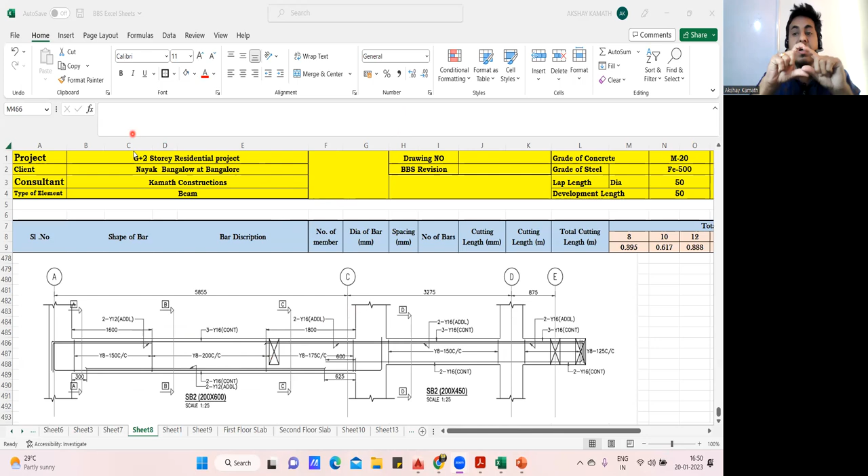Just look at this drawing, you can do the BBS of this. What is the difference in the BBS of this is, see, previously whatever beam we used to take, all were having the same depth, right?

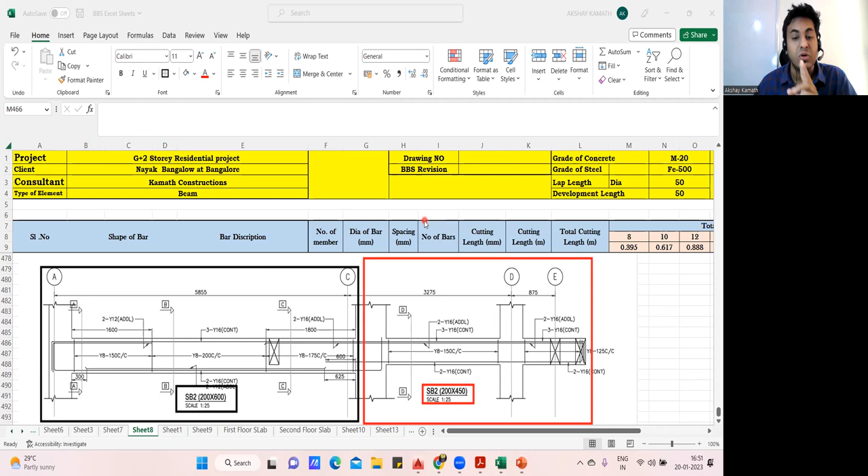But here if you observe, we have two different depths. You can see this beam depth is 200 by 600, that is this particular beam up to here. After that, the next beam is 200 by 450 depth. So now, since the beam depth is different, your BBS remains the same, but one small change will happen. We'll try to understand that.

In case of top reinforcement, nothing will happen. This is your top reinforcement. Your bar will start from here, go all through, and stop here.

Can you read the number of bars required? It requires a 16 diameter 3 bar. Here also it is 16 diameter 3 bar. That means from A, B, C, A, okay there is no B, A, C, D, and E - throughout you are going to provide a 16 diameter 3 bar at the top.

You can do the BBS of this because you know the length, this clear span, you know all the offsets to be deducted. You can do that, that is not a problem. And also the top left extra, right extra can be done.

Again, you can see you have to provide a 12 diameter 2 bar, that is a top left extra up to 1600. This also you can do. Similarly, if you come at the center span, you have to provide a top extra here of 1800 length, and it will be a 16 diameter 2 bar.

Similarly, if you come on this side, again you are supposed to provide a 16 diameter 2 bar additional, you will provide it up to here, and then from here again 16 diameter 2 bar additional you are supposed to give. Those things you can do, but the main question is about the bottom bar.

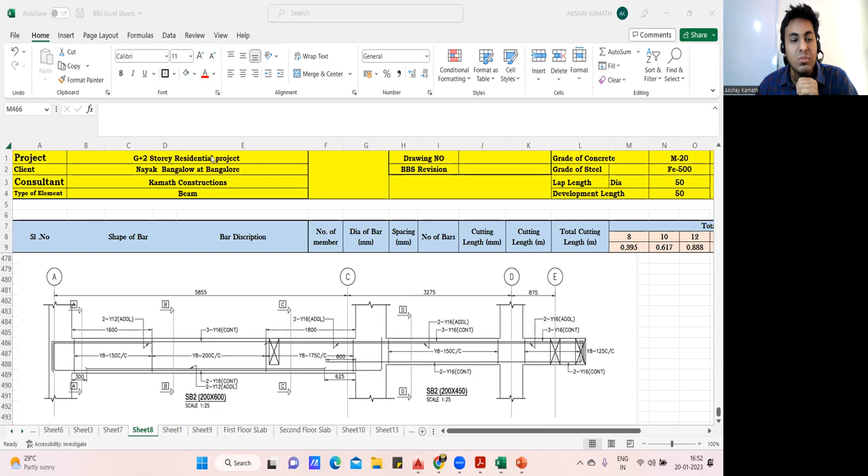Now in the bottom, you see the bottom bar will start from here. It won't go completely. It has come here, and from here you see it has gone like this. Did you see this? Why is it like this? Why is it that we are not taking the bar completely?

The reason is about the depth. You see, this is 600 depth, that means your bottom will be here. This is my 600 bottom, and this bottom is 450. My 450 will be here.

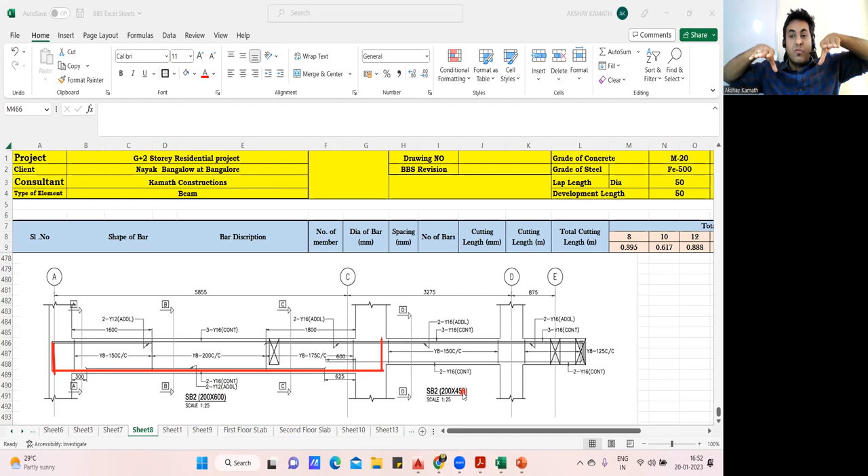The top level will remain the same in the beam. If I'm seeing from the top, my 450 and 600 beam, from the top it will look at the same level. That is why the top bar I took completely. Whereas in the bottom, 600 will be here, 450 will be here. So you cannot take your 600 bar completely because your 450 is starting from here.

That is why what we do, you see this bar has come here, gone straight, then it has given the development length here. And the next bar, what we do, we start from here, we brought it, and like this we are going to bring it. We have to overlap it. Only that is the catch, what you need to do.

How much is the overlap length, that is given - this is 600 additional length you have to consider. This much BBS you can do. I'll explain you once again what you're supposed to do - how you'll find the development, how you'll find the bottom bar for this.

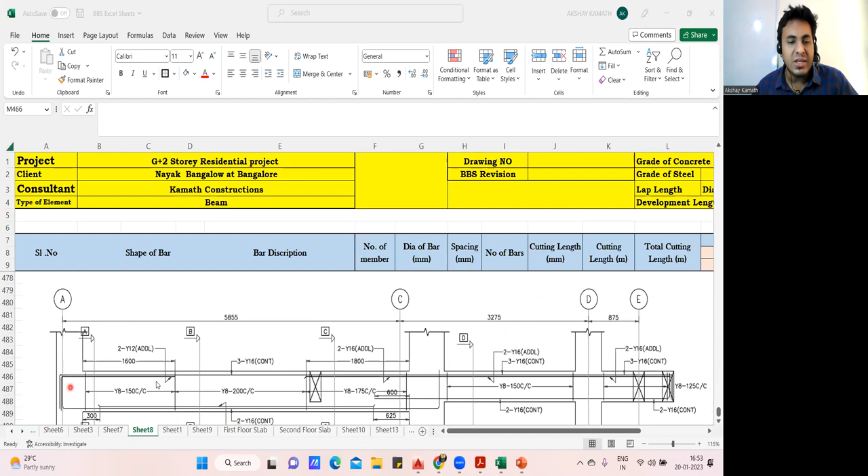It is very simple. This clear span you can find from where, from here to here you can easily find it. This is clear span. Then this width, next you have to find this one.

How will you find this? Whatever is the width of your column, from there you deduct one cover of the column, that is 40, so you'll get this length. Similarly here also, whatever is the width of this column, from there you deduct one column cover, you'll get this one.

Regarding this portion, you know how it has to be done. They will give you the development length. So whatever the development length is given, in that the red color portion is already taken care of.

Whatever is left out, you have to do this. If that is not given, then whatever is your depth of the beam, from there you deduct the top cover and the bottom cover, and then you multiply, you take 2/3 of that. Then also you'll get this. Otherwise, usually they give development length, which we used to do. This is 57 times the diameter of the bar. So 57 times the diameter of the bar minus, if I do this one, I'll get this.

So this you can find. Similarly, whatever you get here, the same thing will be here. So this BBS can be done easily. Now, when you start the BBS for this on the other side, it will start in this way. This also remains the same. So this bar has to be taken up to here.

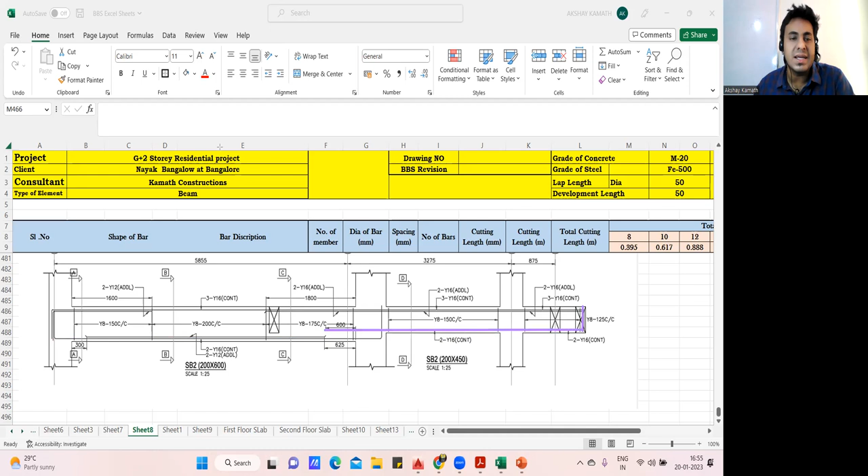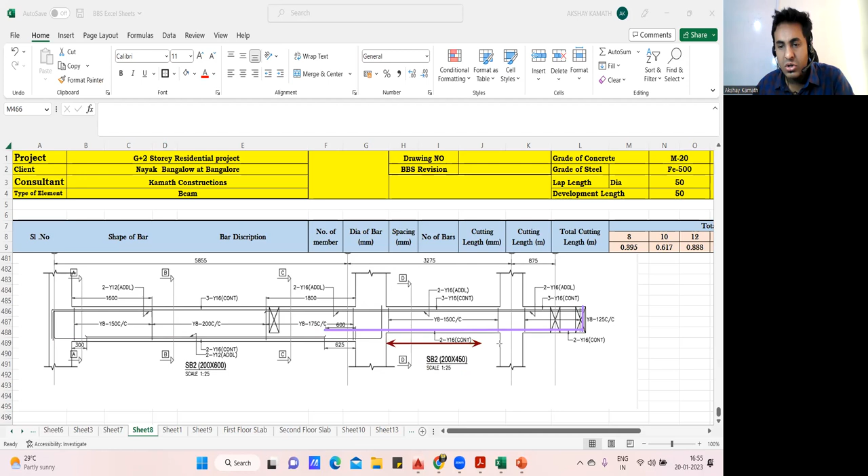So how you will find the cutting length of this? Cutting length will be very simple. What you do, you take the length from here. You know this length, isn't it? This length can be found easily from the face of this column to this outside. You can get the length. How? It is already there in the drawing, or you can do that calculation from the AutoCAD. This length you will be knowing.

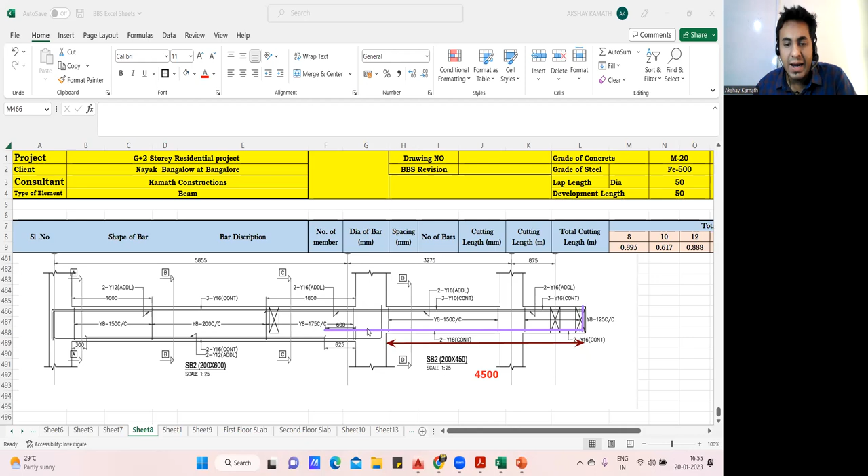Let us consider this length. I'm taking some random value, which is 4.5 meter, or let us say 4500 mm. Now, for that, I'll add the width of the column. And again, this 600 mm extension they have given, that means from the face of your column how much extension it has to happen. It is mentioned 600 mm. So 4500 plus the width of the column plus 600, I'll get the total cutting length of this bar. Very simple.

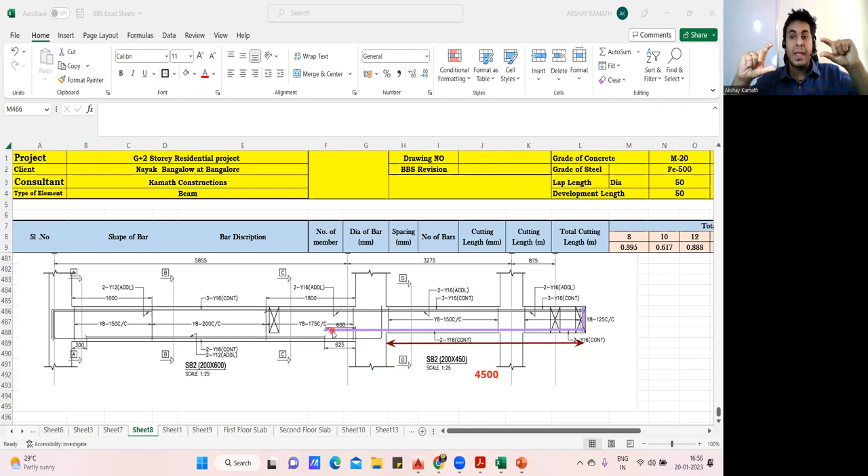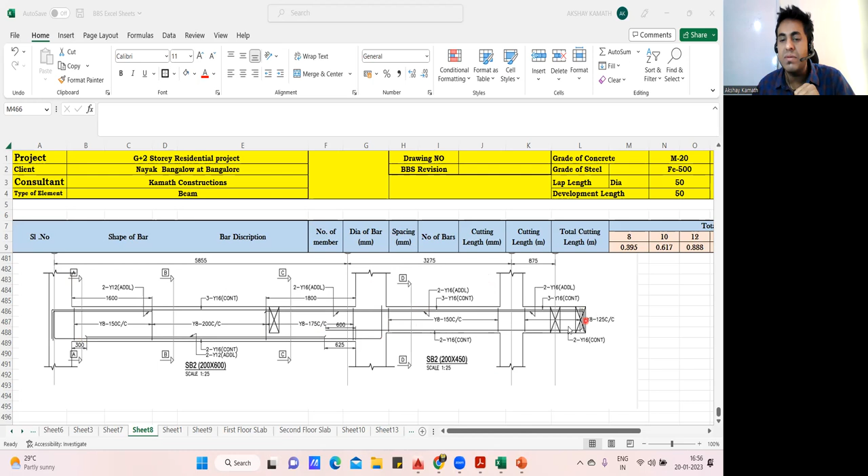This you can do. So this usually comes when you have two beams having a different depth. That is why I wanted to explain this part, why I took this as a kind of complicated beam. Otherwise, the rest remains the same. Finding the cutting length, everything remains the same. Only thing is you cannot take the bottom bar completely. Your bottom bar will stop here, and this bar will come from here. This is one change which you need to understand. Similarly, you'll get different bars like that. So based on that, you're supposed to do it.

Let me check if I have any other beam similar to that. Other than that, rest all beam sizes are same. Whenever there is a varying depth, this is how we are supposed to do that.

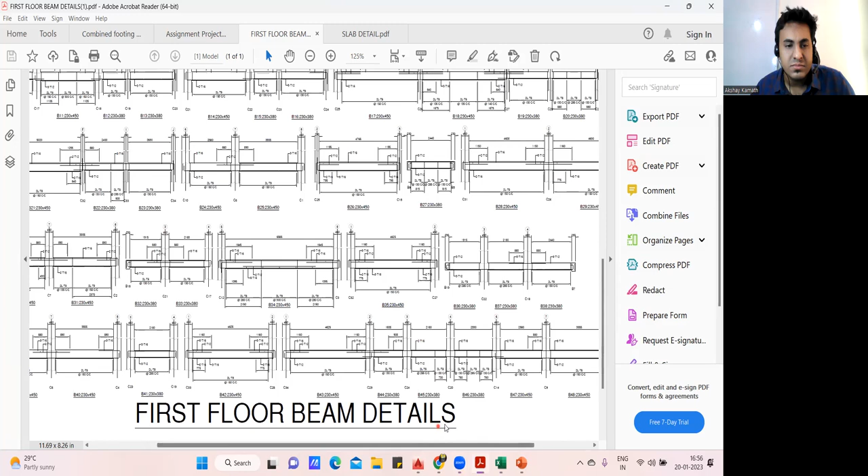This is one more drawing where the same thing has happened. This beam depth is 230 by 450, whereas this beam is 230 by 380, 380, 380. So there is a variation in the depth. That is the reason you see the bottom bar has come like this, and then it has come like this, and it has gone like this.

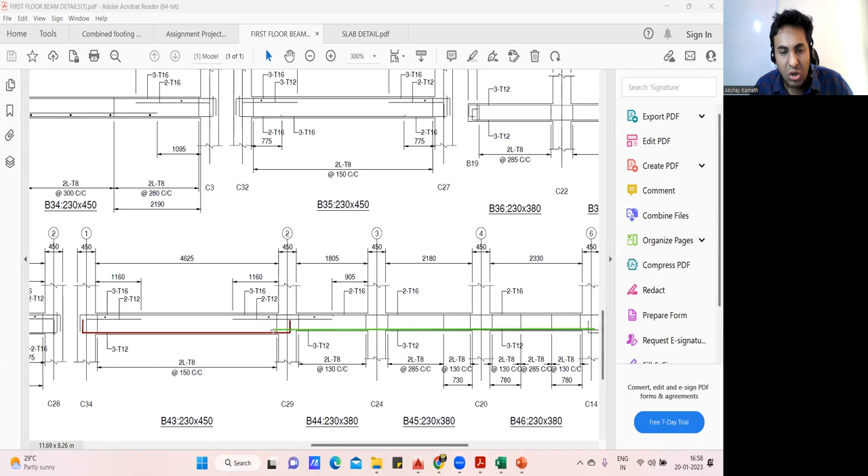And the other bar, how they have done it exactly: it has all started from here and gone like this. So how much is this extension, the green color which has extended from here to here, that will be mentioned. Here it's not mentioned, but usually in the drawing they will mention it. Based on that, you have to prepare the BBS. Rest all things remain the same.

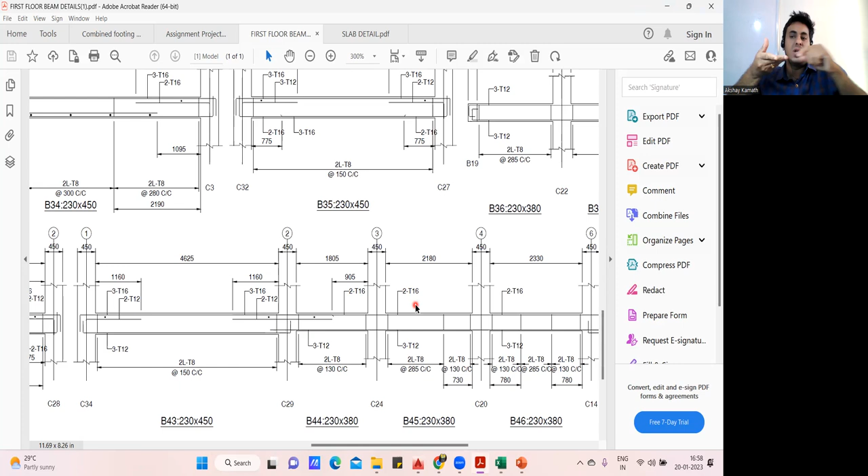So whenever you have a beam of different depth, this is a kind of drawing they give. And you know the reason: 450 level will be here and 380 level will be here. So when you pass your bottom bar, it cannot be bent and taken to the top. So what we do, we stop our bottom bar here only, that is 450, and the 380 bar will be taken like this, it will overcross. That is why you can see the same thing happening here.

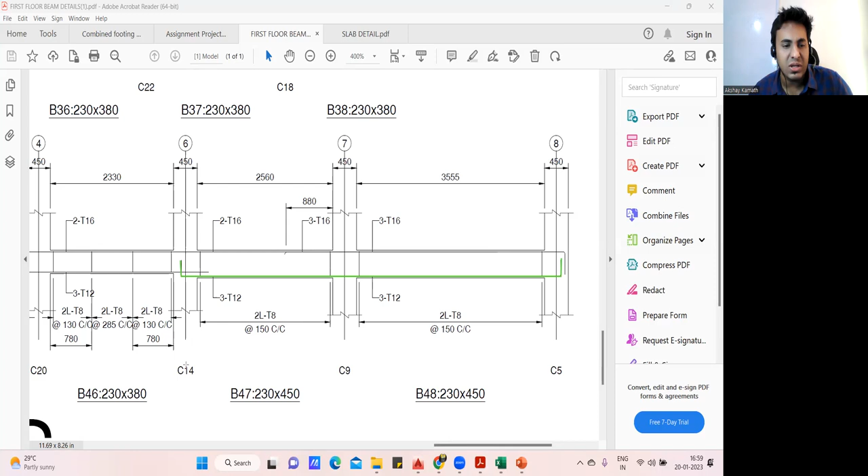Rest all things you can do. There is the same thing here also. This is 380, this is 450. So you see how the bar has come, this bar has come here, and since it's 450, they have taken it like this. Then the 380 depth bar will start like this, it will go like this.

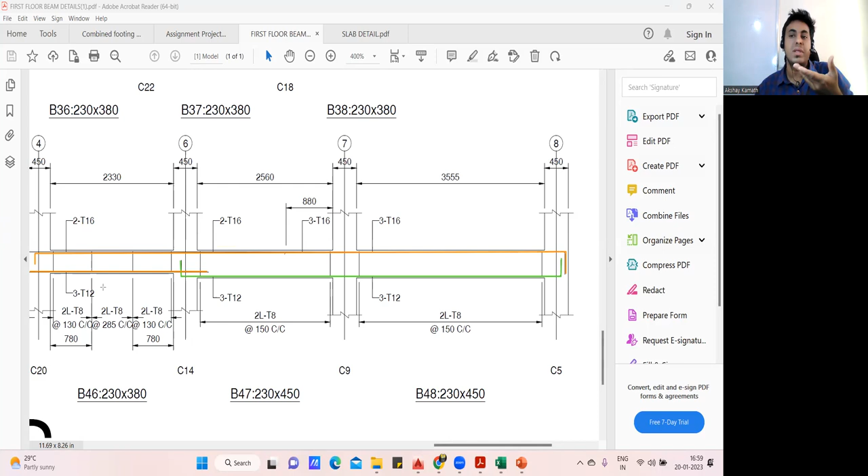Whereas top bar will be continuous only, because the level will be same, no? So at the top there won't be any difference. Top will be same like this, it will come. Only at the bottom there will be a difference. Got it? So this is one thing which I wanted to tell. Other than that, rest all BBS you can do on your own.

Now another question. Sometime what happens? If I go to the general drawing, I already explained you this.

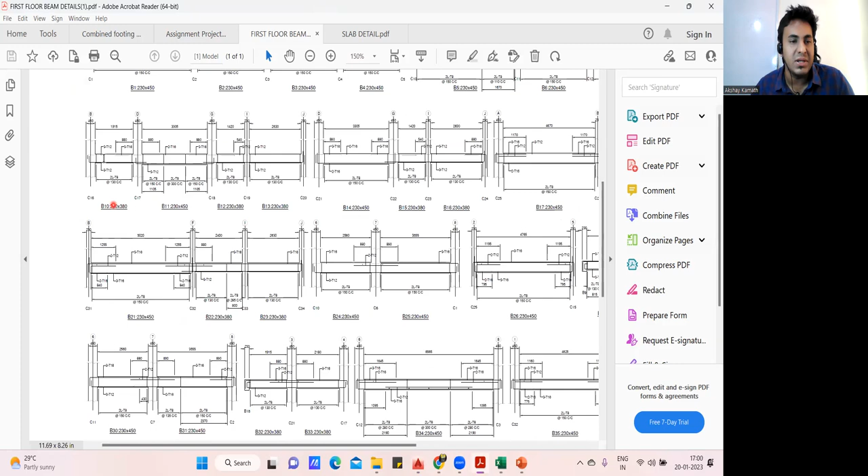So this is a typical layout that you get. Suppose, see now what has happened here. Sometimes the structural consultant will not give you how much is this top extra bar and all. Like here they are mentioned, isn't it? Here these people are mentioned.

From here it is 800 mm, from here it is 880 mm, and then here you can see top left extra is 1255 and all. But few of the consultants don't give that.

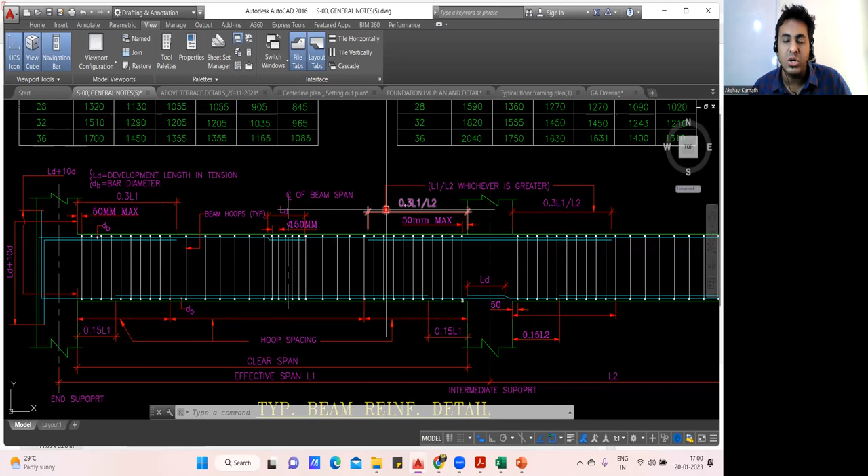So in that case, what you're supposed to do is get something called a general drawing. In the general drawing, remember your top right extra and top left extra should be 0.3 into L1. This is 0.3 into L1, or some people take this as L by 4, some take L by 3. L by 3 is 0.33, which comes out to be 0.3 into L1. Some people take this as 0.25 also. That is also correct — it totally depends on the consultant giving you the drawing.

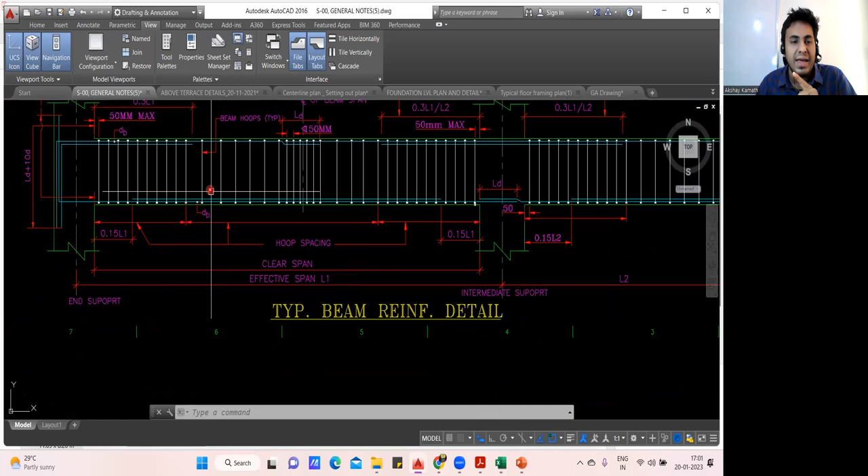If it doesn't mention, you can refer to a general drawing. You ask for a general drawing, and based on that you can do the calculations. That is how you're supposed to do it. Here L1 is the effective span, from the center of this column to the center of this column. So if you want, I can take one example.

Let us consider my effective span is 5500. Then what will be my top left extra? You just tell me — what will be the length of this top left extra?

You just take the formula 0.3 into 5000 — it should be from effective span, center of the column to center of the column. So 0.3 into 5000, it will be 1500. Finish — you got the answer. If somebody asks you what should be the green color length, it is 1500. Same here also it will be 1500. That is how you are supposed to do it, and based on these calculations only, all these things are given in your drawing.

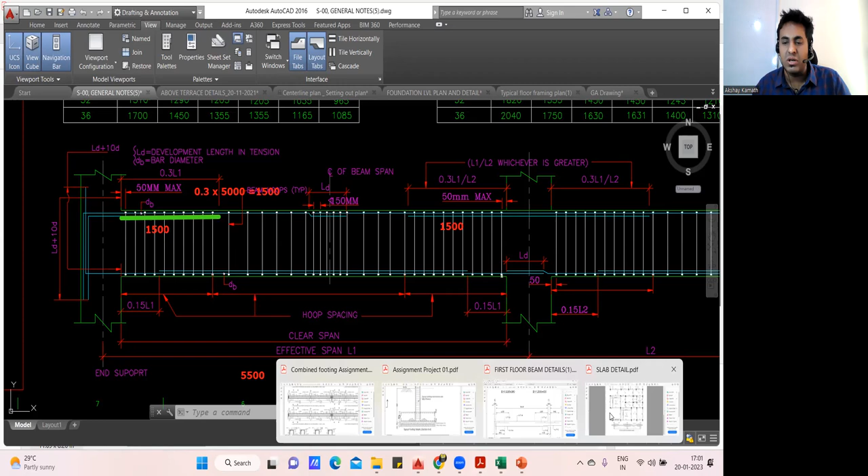How did the person get 1255? He took 0.3 into this value, so he got 1255. Now again, 0.3 is not constant — some people give L by 4, some give L by 3, some give 0.3 and all. Based on that you are supposed to do it, but I've explained how those things come.

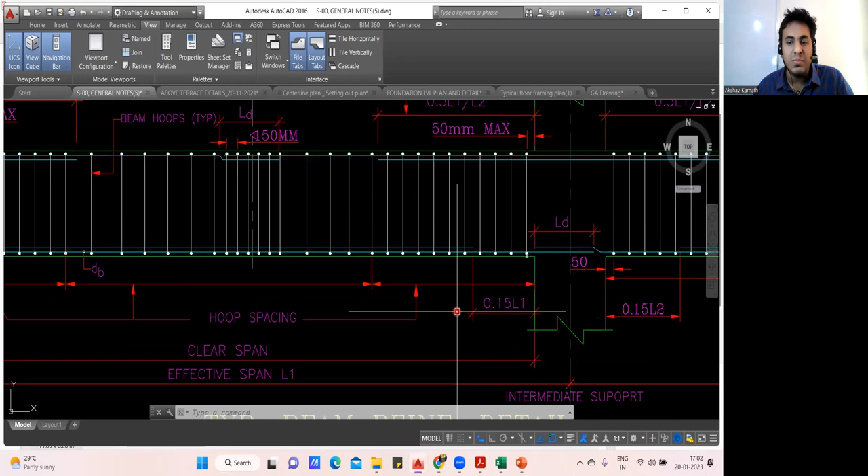Then other than that, the bottom part — again for the bottom also, the same thing is given. So bottom curtailment bar, you can see — this is my bottom curtailment. This is good, but from here how much gap should I leave? From here also, how much gap should I leave? That is mentioned — from the face of your column, leave 0.15 into L1. From here also you leave 0.15 into L1.

That means what is 0.15 into L1? So 0.15 L1, we took 5000 as the effective span. You do that — how much will it be? 0.15 into 5000, so it is 750 mm. That's it, so you got this 750.

Here also it is 750. So what you'll do — if they ask you what is the gap from the face of the column, you have to leave 750 and start your bar from the face of your column. And from here also you have to leave 750 and start your bar. So how did they get 750? They took 0.15, 0.15.

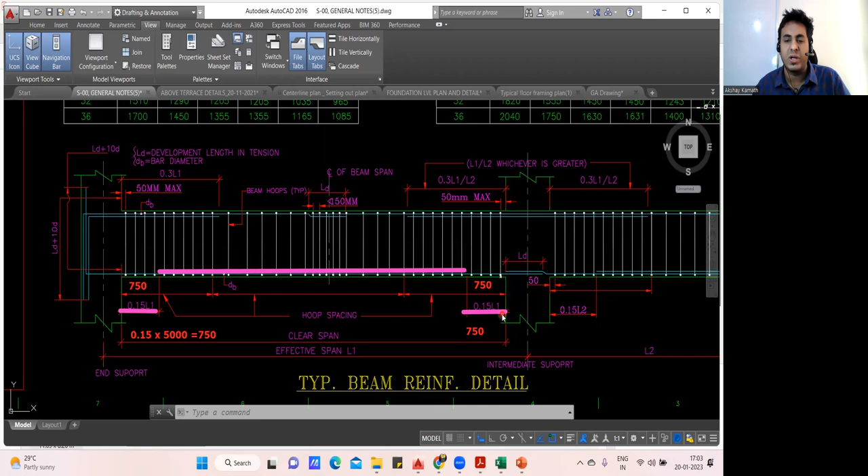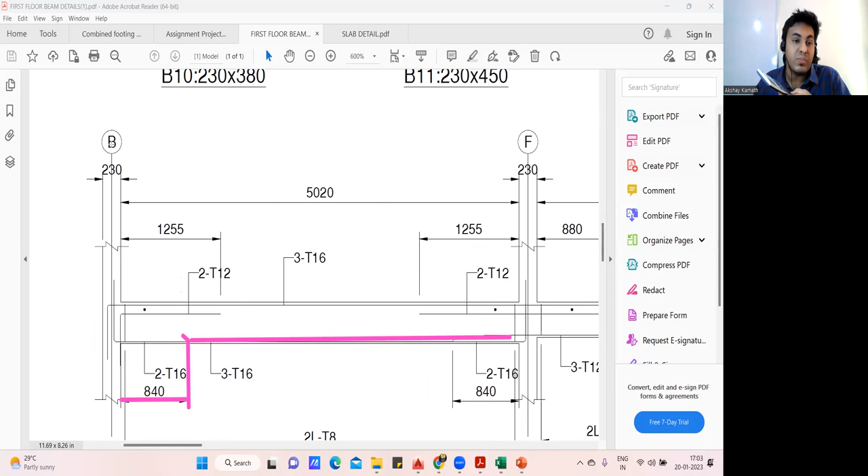They took effective span, that is 5020, multiply by 0.15. If you do, you should get 840. Let me do that — so 5020 into 0.15, I'm getting 753, because our effective span is from center to center. Let me do that also: 5020 plus 230 into 0.15.

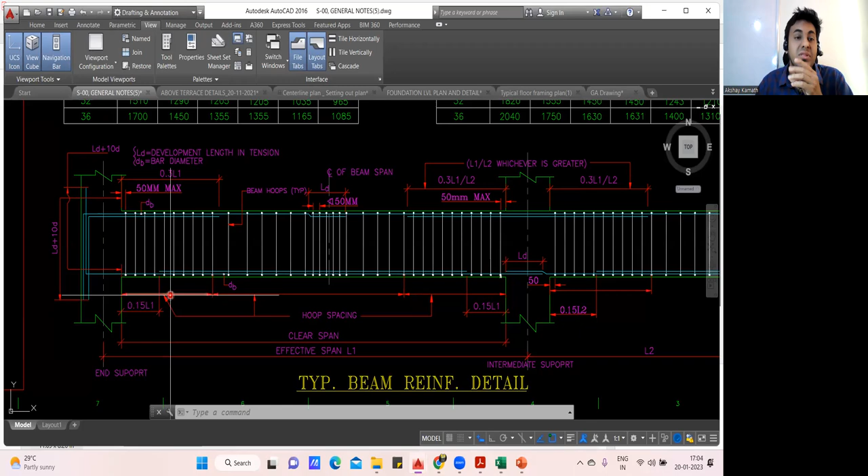Still it won't work out. The reason is this won't always be 0.15. You need to understand - we have taken 0.15, but few people take this as 0.14, meaning they take L by 7 also. So it totally depends, but whatever is given in a general drawing, you can follow that. There's no problem with that.

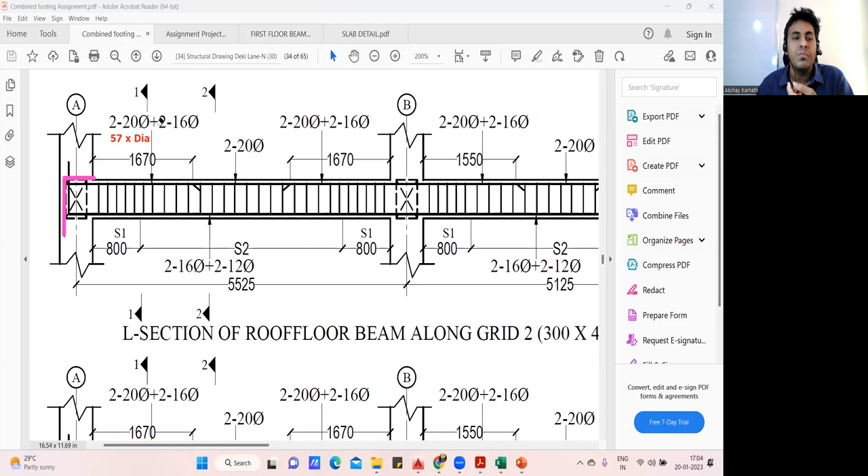That's it, that's it. Other than that, I think I've explained the rest of the things. Now the last question is that, in the beam, they are going to give you the development length. For example, here, see what we used to take - this was my development length, from the face of the beam to this one, which was 57 times the diameter of the bar. According to our calculation, 57 into dia of the bar we used to do. Suppose in some of your local projects, people don't give all these things - then what do you do? If they don't give you the development length, your calculation will be very simple. I'll explain for one beam how it has to be done.

I'll take one simple beam from here, for this beam. Let me take only a single beam. For this beam, I'll tell you how it has to be done. Just concentrate on this, nothing else you have to look.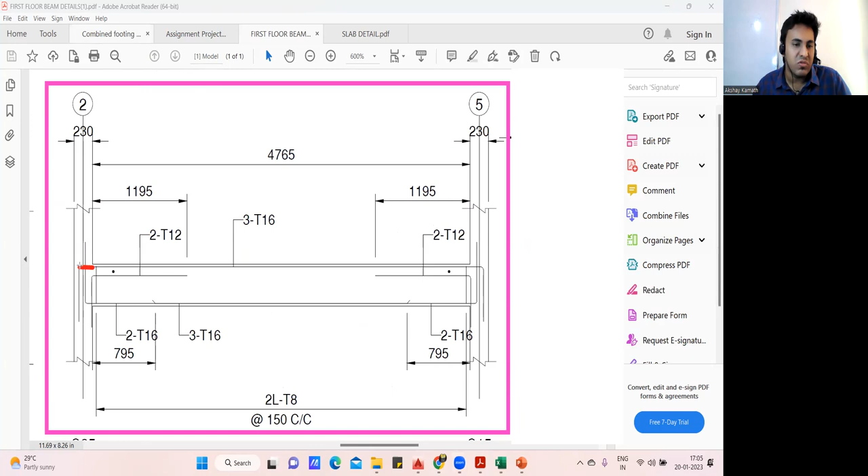So how will you find this development length that I want? This I want you to find - this development length. How will you find it? It is not 57 times the diameter of the bar, or maybe in your drawing that is not at all given. So in that case, what do you do?

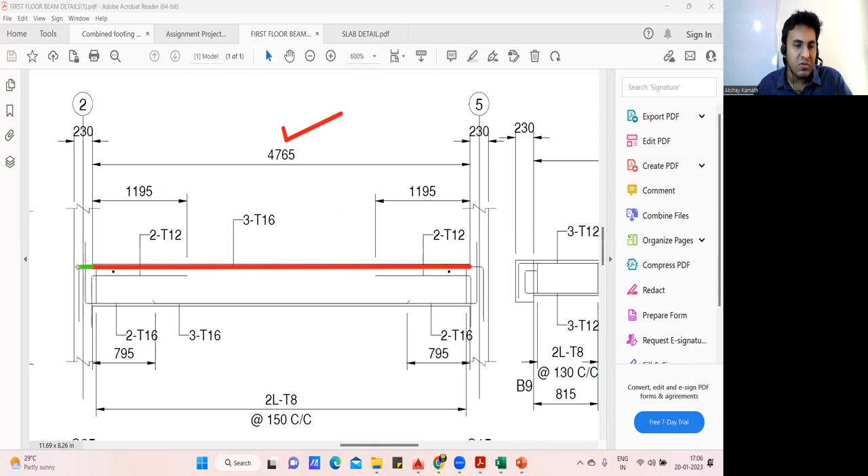Very simple - first you find outer to outer bar. First what you do is find the clear span. From here to here, you find the clear span first. How much is that? It's already given, 4765. Done. Next, we'll find this one - from here to here, and from here to here. How will you find that?

Very simple - we know the width of the column is 230. So whenever we take the green color bar, we don't take it completely - whatever is the column cover, we deduct it. From 230 I'll deduct 40 mm, so it will be 190. I'll write here - this will be 190 mm. This also will be 190.

So if the development length is not given, you have to follow this method and it will be correct. Now the main question is how to take this one. These things are already understood, but how will you take this one, and how will you take this one? That is a big question, right? You don't have the development length. If you had the development length minus 190, that would have given you the blue color. Now what do you do? There are certain construction practices.

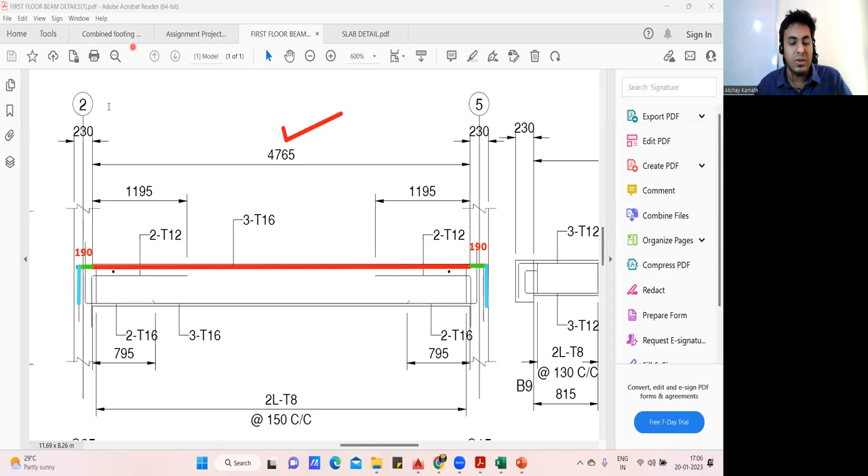What we do is, whatever is the depth of your beam, you take that and multiply by 2/3 of that. That's it, finish. What do you mean by that? Simple - what is the depth of my beam? So my depth of the beam is given here - it is 450, 230 by 450. So what you do is 450 multiply by 2 by 3 - 2/3 of the depth you take it. That's it, so that itself will be that L.

This portion, this portion - so 450 into 0.67 I do, because 2/3 is 0.67. So 301, I'll say 300 mm. Finish, that's it - so this will be 300 mm. This also will be 300 mm.

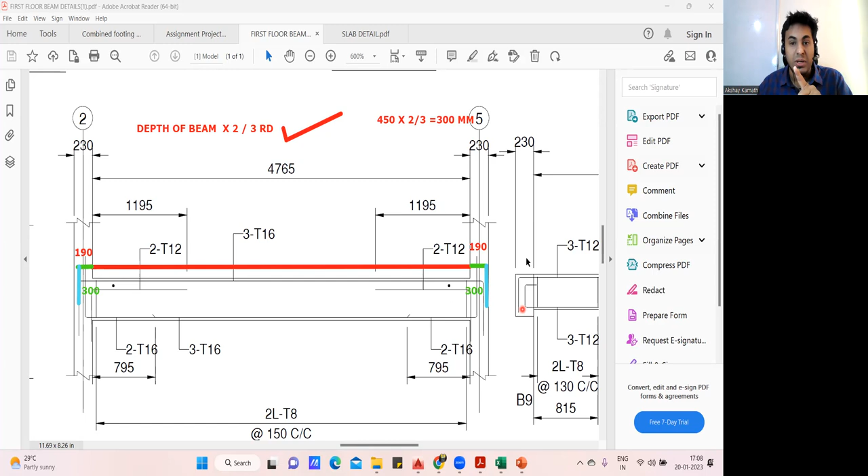Now you'll ask me, sir, what is the logic behind this? So there is no logic - these are certain construction practices what we adopt. Otherwise, there is one more logic - whatever is the depth of your beam, deduct the top cover, deduct the bottom cover, and take that. That is one way of doing it. Else, whatever is the depth of your beam, deduct one top cover, one bottom cover, and then take the 2/3 - like for footing, we used to take that L, no? Same thing you can follow for the beam also. This is a normal construction practice what we do.

Usually, in a bigger construction company, they usually give you the development length - then you can follow that. If the development length is not given, when you work for local projects, usually they don't give you the development length. Then how will you calculate the BBS? You follow this method - this depth, whatever L you are going to keep in the beam, this L, what you do.

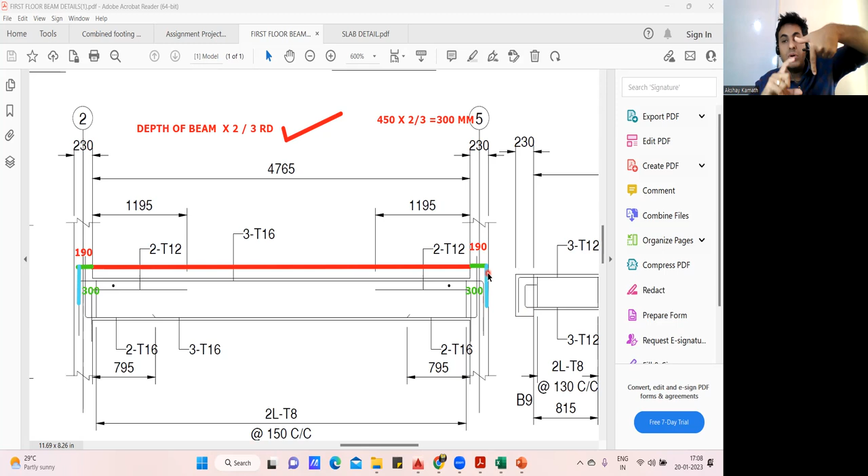Take the overall depth of the beam into 2/3. Whatever answer you get, like if 450 is the overall depth, into 2/3 I got 301, so I took 300. So this I'll keep 300, 300. That is sufficient, not an issue with that. But you should not give it too small, otherwise your beam becomes a simply supported beam. So whatever that 2/3 gives you, not an issue.

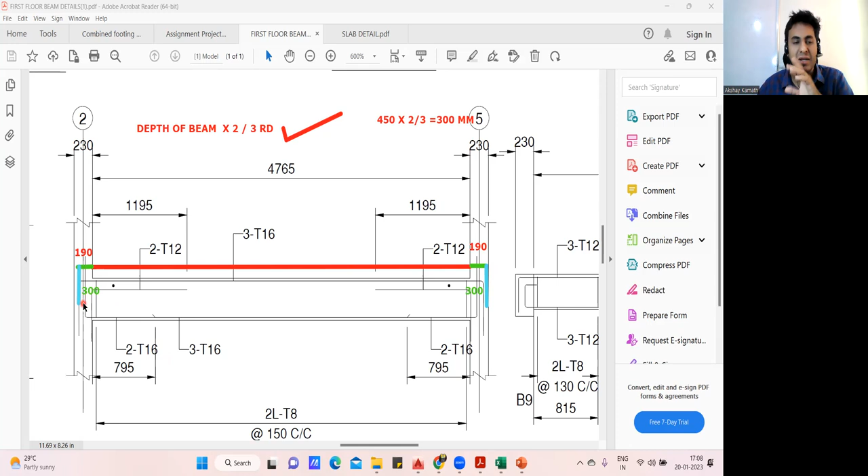So with this, I think most of the complicated things in the beam BBS, all the things I've addressed here. There's nothing left. Let me check. Development length portion I've explained you. Then whenever there's a different depth of the beam, that is also covered. Then these things also I've covered.

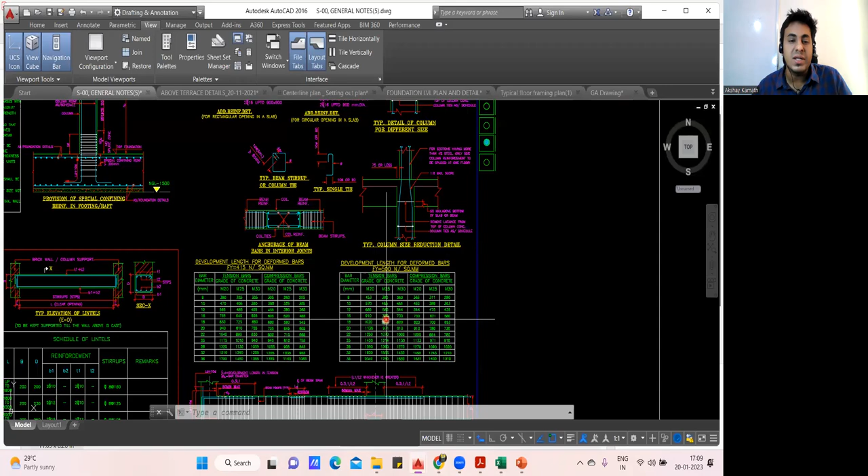About the general notes - previously we used to take development length. Sometimes due to earthquake resistant structures, they give you LD plus 10 times the diameter of the bar. Based on that, you do that. This is already addressed in my previous lecture. Whenever there is an earthquake resistant structure coming up, detailing is done according to the 13920 code book. What we do, you take development length plus 10 times the additional diameter we take.

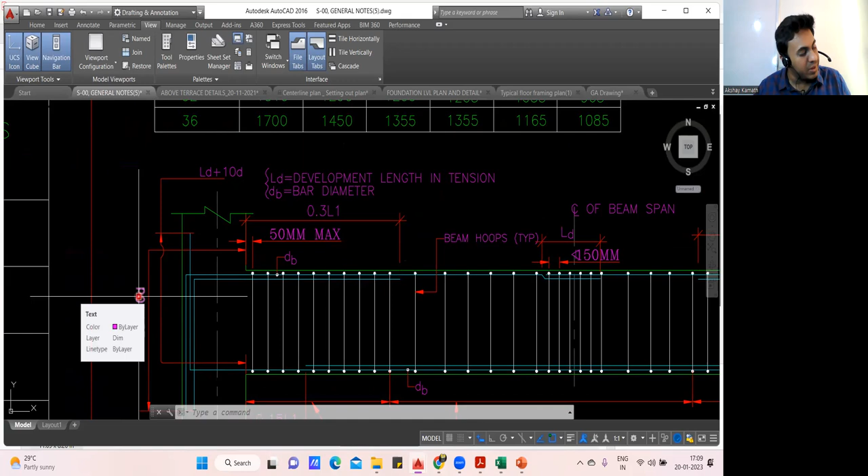Okay, fine, so that is also explained, and everything is explained. Suppose if nothing is given, then you get a general drawing. Based on that, you take this L by 3 or 0.3 into L1 and all. So I think almost everything I've covered in the beam part. There's nothing left out. All the complicated beams, everything has been taught here. Great, so I hope you have enjoyed my lecture up to here. Try to practice the beam BBS.

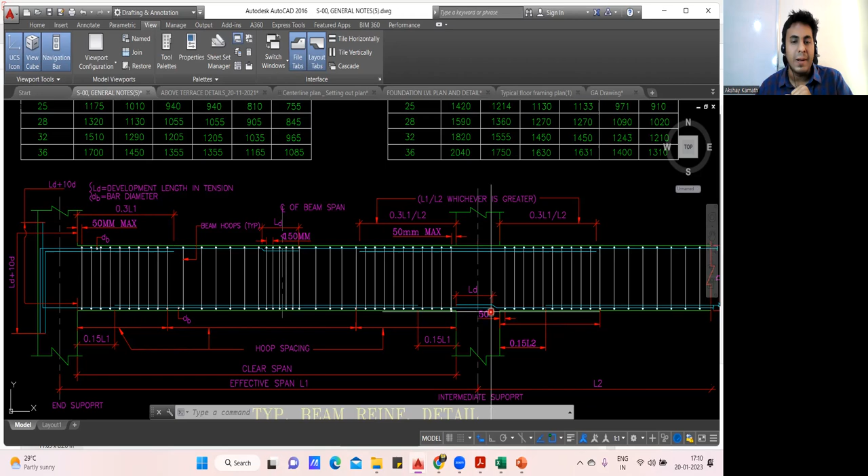It's very simple. Okay, so there will be one more complication in your BBS, I'll explain that also. The complication will be something like this. Now, in beams, we did not do any lapping much, right? We did not do any lapping much. Now I'll show you where the lapping will come.

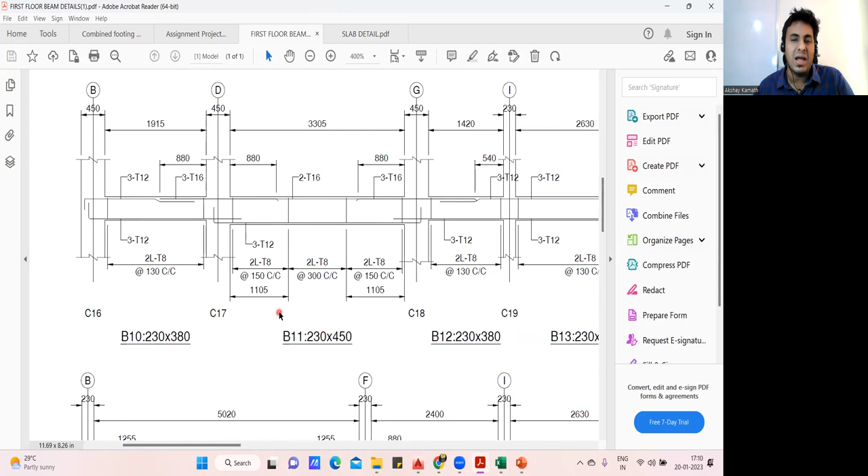Now look here, here I can give you some examples of lapping. But usually, I'll tell you, usually no one will give you this kind of detailing. Whenever we as a structure consultant do the designing, I'll provide a 16 diameter 2 bar completely. I don't provide a 12 diameter 1 bar, and then not provide a 16 diameter - then I have to do the lapping. So here you can see the same problem happening.

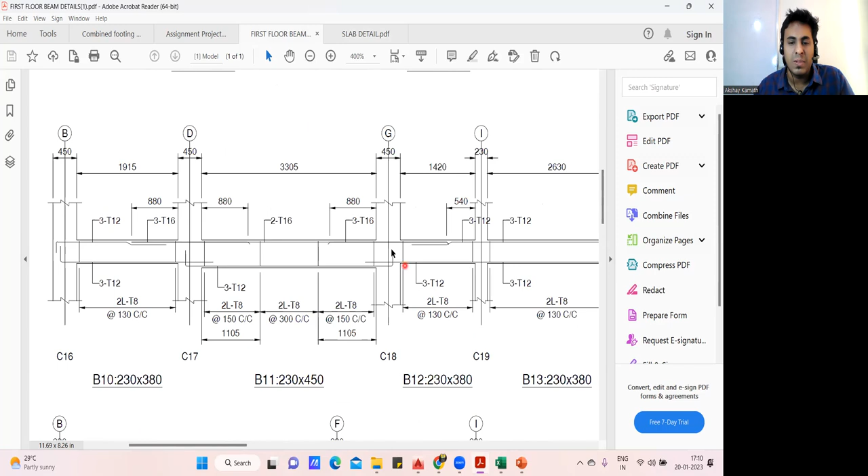Maybe here, or I'll show you one more. Okay, but this is too much complicated. That's it, okay, I'll explain what are the complications here. We'll wind up this - I mean this is not required, only up to this part I'll take it. Okay, this is not required, leave it.

See here, this guy is providing a 12 diameter 3 bar. This is your 12 diameter 3 bar. Then after that, you are going to provide a 16 diameter 3 bar again - that means you're doing a lapping here. And the 16 diameter 3 bar will go continuously. Then again in the middle portion, you're putting a 16 diameter 2 bar. And then again 16 diameter 3 bar. So what is happening here?

What is happening here - it was 12 diameter 3 bar, but suddenly there is a lapping coming. Even though the bar is not going more than 12 meters, still you have to provide a lap because you're lapping a 12 diameter and 16 diameter. Then you need to add one lap length here. So that is why usually we don't give detailing something like this. This detailing is not a good detailing. A good consultant has not given this.

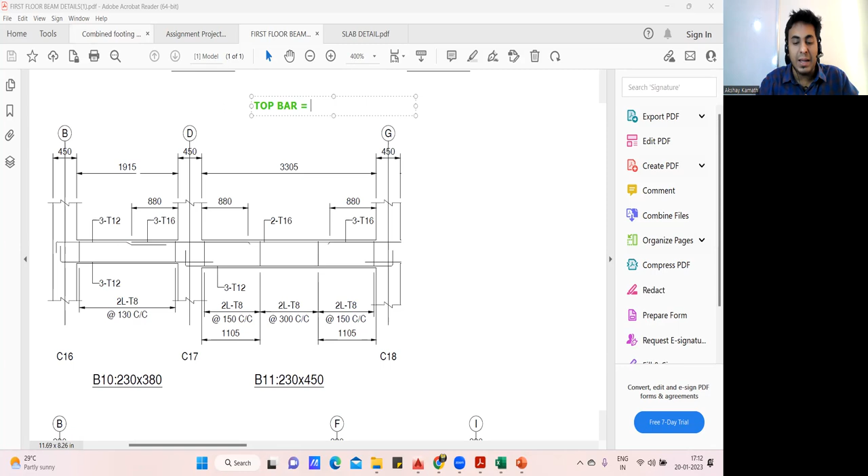If you are lapping a top bar, you can do the lapping in the middle. Now we are speaking of the top bar only, no? What is the middle portion? This is 1915 - if I divide it by 2, will I not get exactly the middle of this beam? So I can do the lapping in the middle. That means this length, how will you find now? I want this length to be found. This length.

How you'll find this length? You don't have anything given from here to here. Nothing is given, so what you do? What you are supposed to do? It's very simple.

First you should know how much is this one. So this is 450. Wait, let me do it properly. See, all this are a little time consuming.

This will be orange color. Then your development length, I'll take a red color. Then the remaining portion, I'll go with a green color up to here. Now you tell me how you'll find this.

So this you can find. Red color you can find. You know 450, 450 minus 40, one cover, I'll get 410. So this will be 410. This is simple. Now this orange color, how you'll find?

Orange color, simple method I'll adopt. 380 is the depth of my beam. I'll take 2/3 of that. I'll get this one. Just now I explained you. I'll write it here: 380 into 2/3.

2 by 3, how much you'll get? Do it. So 380 into 0.67, 254 I'm getting. You can take 250 also, no problem. Practically no one will give 254, so always make a good round figure. Go for 250 mm.

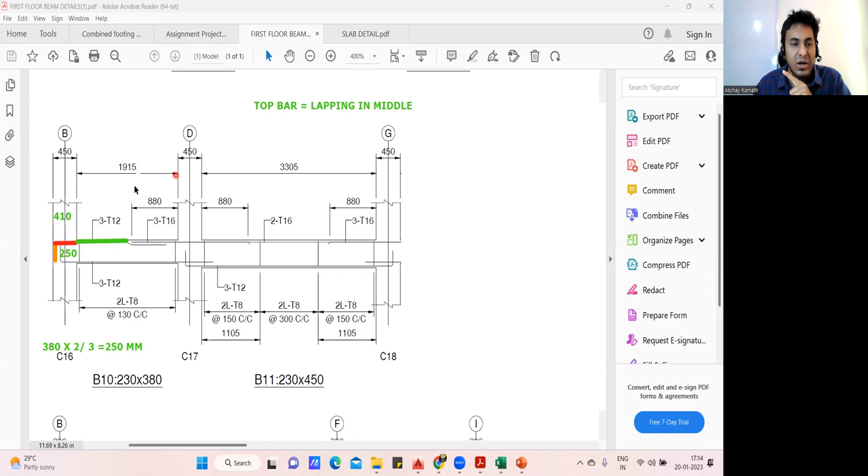Even I also don't know. Simple logic will apply. We know that lapping will be done in the middle for the top bar. So this is a span what I have. 1915 is the span of this beam only. What is half of that? Half of 1900 is 950.

1900 I can do, so I'll take this as 1900. You can take anything, but you should exactly half it, right? Whenever we do the lapping, we lap at the center. So 1915, I'll take 1900 only. If I divide it by 2, how much will it be? 1900 divided by 2 is 950.

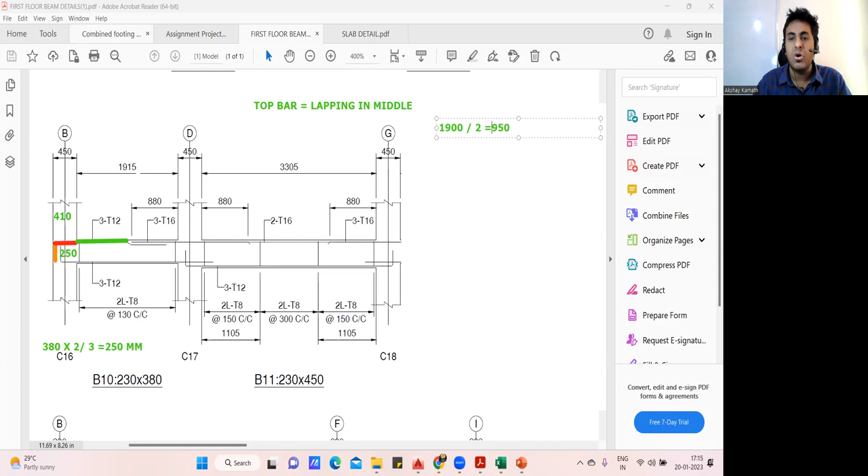So you can take 950 or even you can take 900. It doesn't matter, but make sure if you're taking 900, you have to cut the bar 900 on the side. If you're taking 950, take 950 on the side. But I'll take 950 only. So this will be 950 for me.

Got it? You're able to understand. So this length I'll cut 950, this will be 410, this will be 250. So in this way I'll provide a 12 diameter 3 bar. So my 12 diameter 3 bar will go, and after that, once I reach here, I'll lap this with a 16 diameter 3 bar.

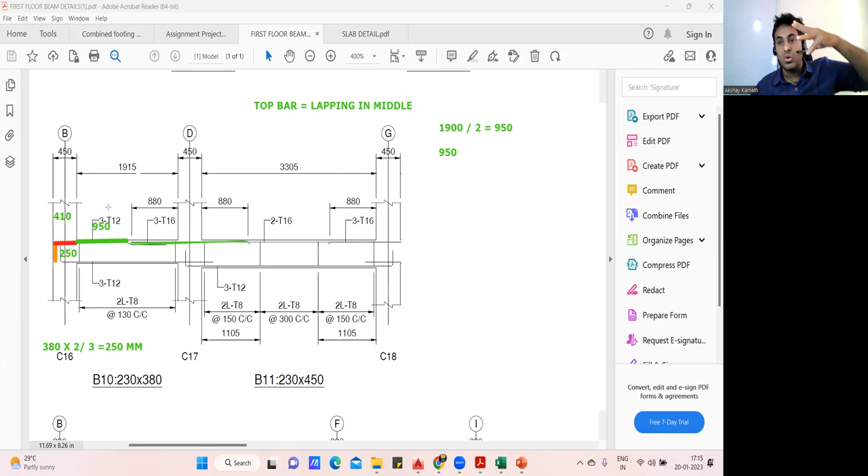And my 16 diameter 3 bar will go continuously. So this is my 16 diameter 3 bar now. 1, 2, 3 bar will come. 3 of 12 diameter 3 bar will get lap with 16 diameter 3 bar. In this way it will lap.

Where will the lapping happen? Exactly at the center, the lapping will happen. So again this bar will go straight like this, and then of course once it reaches here, only 2 bar will go in the center. Again from here another 3 bar will come.

So it's a very difficult BBS, the drawing itself is not good. It's very difficult to do a BBS for this. But still, I'm teaching you how it has to be done. But drawing something like this, if you give on the site, the site engineers and everyone is going to shout at the structure consultant, and he'll never get a project in his life. So you should not do a detailing something like this.

Try to give it more economical. It's okay, provide a 16 diameter 3 bar throughout. Our calculation is also simple, and on the site the execution can be done in a better way. Now you lap the 16 diameter 3 bar here. So only one change will happen: you'll have to add the lap length, which is 50 times the diameter of the bar.

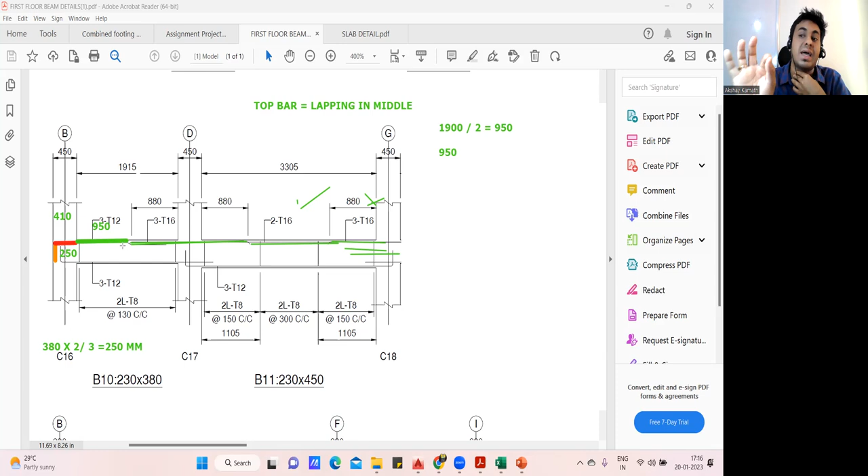3 times you have to add it—I mean not 3 times. For one bar, it is 50 times the diameter of the bar you have to add. That's how you're supposed to do it. But again, this is a very rare case. You never get a beam where you do a BBS something like this.

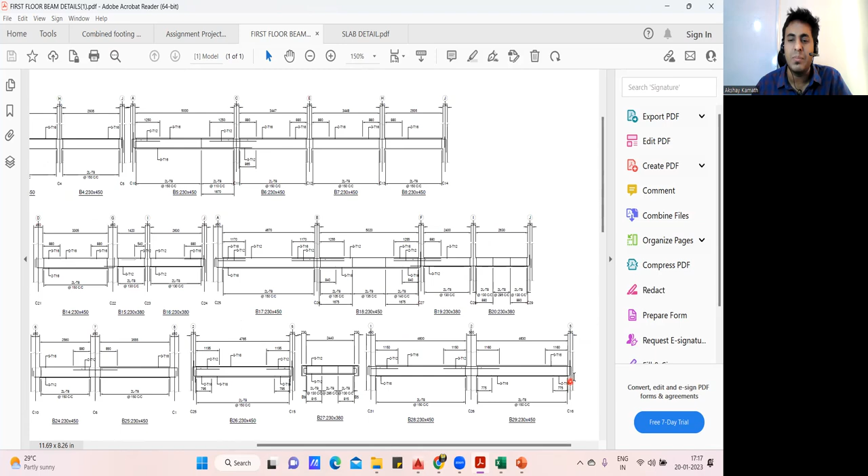It's a very bad way of detailing all these things. Such projects will get very delayed in execution, and the consultant will never get any other chance in his life to do the project, because no one will appreciate such kind of drawings. So always better you try to give a very good drawing. See, this is good: 16 diameter 3 bar he has given throughout, and your top left extra will be 12 diameter 2 bar, and here it will be a 16 diameter 3 bar.

You can do a BBS for that. And bottom is always a 16 diameter 3 bar continuous, and here it will be 16 diameter 2 bar. Okay, this is good. So in this way, if you do it, it's good detailing.

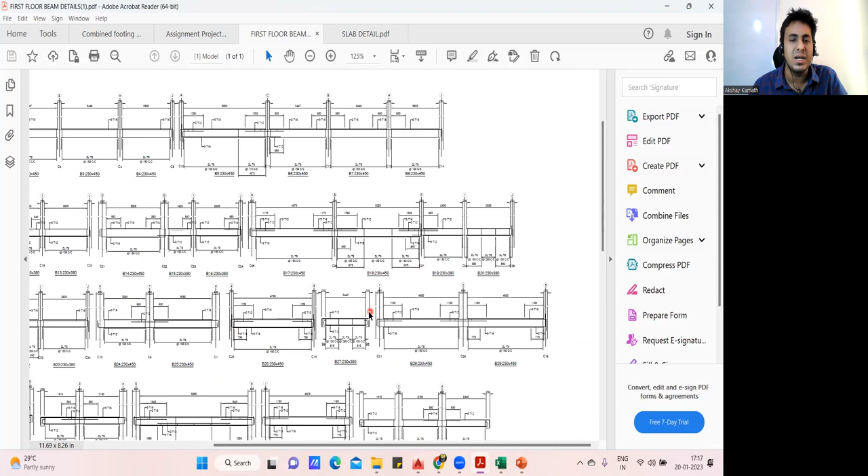Yeah, that's it. So I think most of the things I've explained, that's how it is. Other than that, the lapping concept will come, but that actually comes from a site execution point of view. In BBS, you don't have to worry about the lapping much. In BBS you can do the lapping, but practically on the site when you provide the bar, you cannot provide the lapping of all 3 bars in one junction. You have to alternate it.

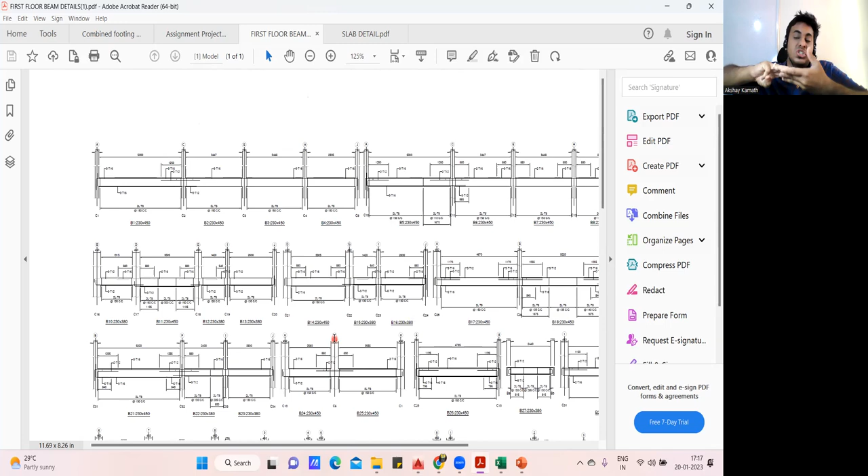So let me give one example for that, because you should know this too. For example, let us consider I'm doing a beam. Let us consider this is a beam what I have, and I need to provide a 16 diameter 3 bar. So how will you provide a 16 diameter 3 bar?

I'll start 1 bar from here. This is my first bar. It will go like this, and end here. I'll do the lapping now. This is the first bar. I'll bring the second bar, do a lapping, take it like this. This is done - imagine the first bar I have kept.

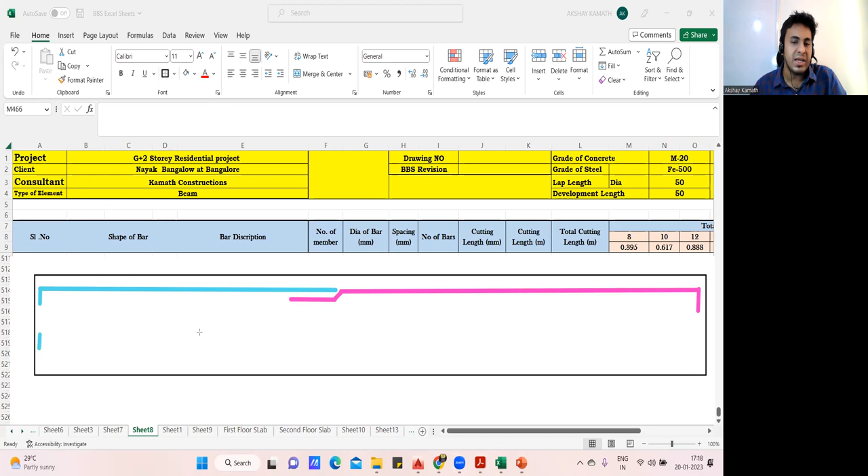Now the next bar, I'll also take, but I'll not do it like that again. Next bar I cannot come and lap it here only, I cannot lap it like this - it will not work out on site. Cutting length will remain the same, but this lapping concept will not work out, because the code says not more than 50% of the bar has to be lapped at one section.

That means if I have 3 bars, only 1 bar, or 50% which is 1.5 bar, or only 2 bars I can lap at one same section. I cannot lap all the bars at the same section. So for the next bar, what I'm supposed to do is not start from there - I'll start from here instead. I'll end somewhere in this portion, and now I'll lap the next bar.

This is from an execution point of view, it has nothing to do with BBS. Next bar I'll take like this, and do it like this. After that, the next bar you take, you can bring it here, and at this point only you can do the lapping. Now you see I'm providing 3 bars - out of 3 bars, how many did I lap at this junction? Only 1 here and 1 here.

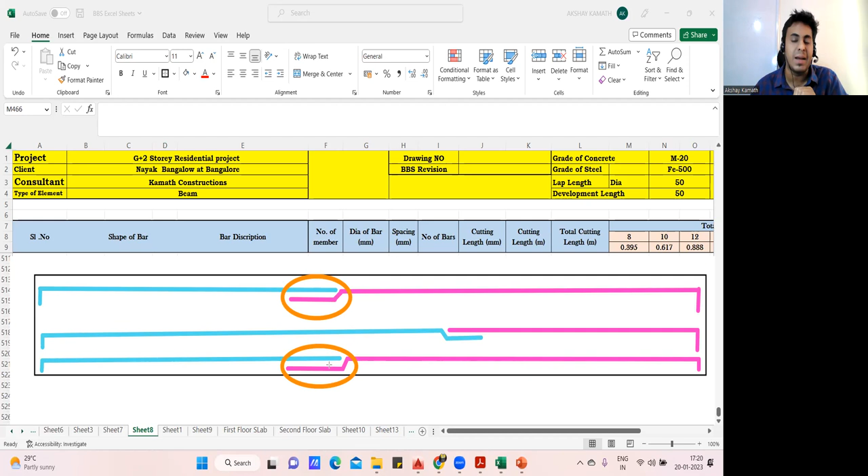So not more than 50% - I mean 2 bars you can say. Out of 3, only 2 bars are lapped here, whereas at this junction only 1 bar is lapped. There is no lapping here. So practically on site, this is how you are supposed to carry it out. Cutting length for all the bars remains the same, but from a site execution point of view, you need to take care of these things also.

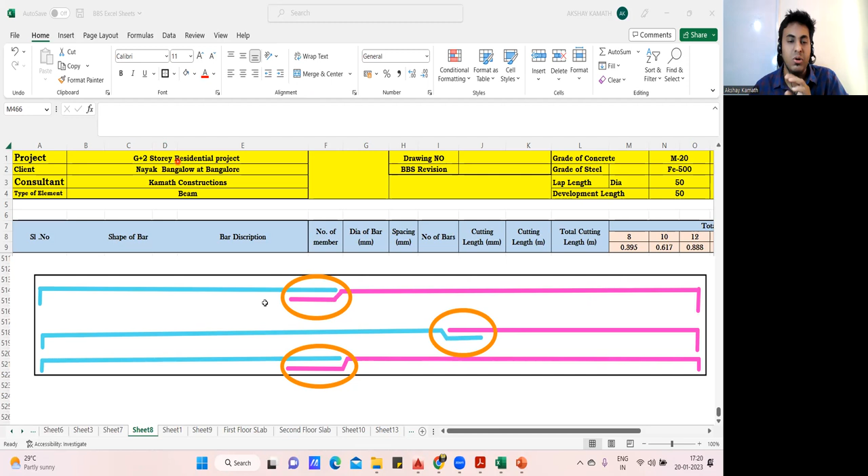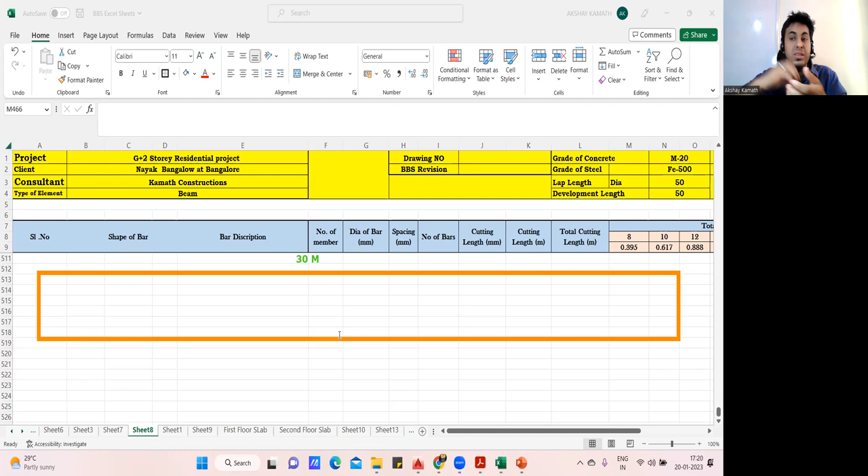Okay, got it? I hope you're able to understand how this BBS has to be done. This problem usually comes when you have a long span. If your span is less than 12 meters, there's no point in lapping, because the bar available itself is 12 meters - doesn't matter. But if you have a continuous span which is almost, let's say, 30 meters, then obviously two laps will come, and you have to arrange those two laps such that they will not intersect at one junction. All the bars will not intersect at one junction - you have to alternate, you have to do the staggering of the lapping.

That is from a site execution point of view, but still I've explained how it has to be taken care of. In spite of this, if you still have doubt and are not able to understand what I was actually trying to tell, you can always get back to me on this number - you can WhatsApp me.